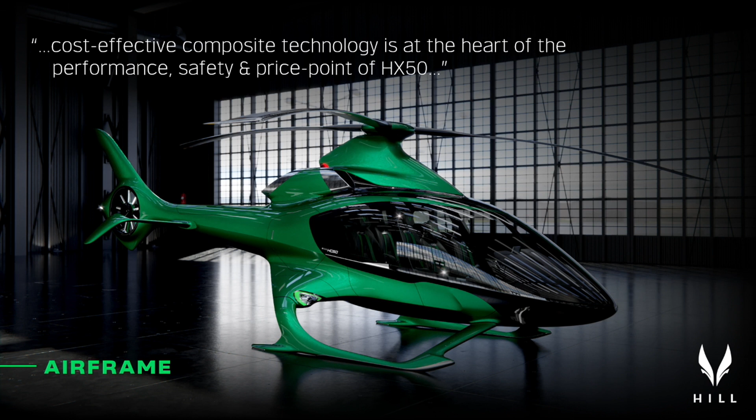Cost-effective composite technology is at the heart of the performance, the safety, and the game-changing price point of HX50. For that reason, tonight we're going to be talking predominantly about our composite development process. It's only been around 18 months since we took the bold decision to make the main structure of HX50 in a single piece, a monolithic carbon fiber crash cell, beautifully styled, aerodynamically sculpted to give us the balance of performance, strength, and importantly, cost effectiveness that we need to bring this game-changing helicopter to market.

In addition, we also laid out how we intended to make this thing with a very clever arrangement of external tooling. Since then, we've pulled together a range of technologies from lots of different industries involved in composite production to bring the price point of composite manufacture down to something that we needed.

In order to do that, we've had to reject the aerospace norms. We've had to vertically integrate not just the carbon fiber manufacturing, but the pattern making, the mold making, and then the part manufacture itself. And with that has come end-to-end control of the quality, the schedule, and the cost.

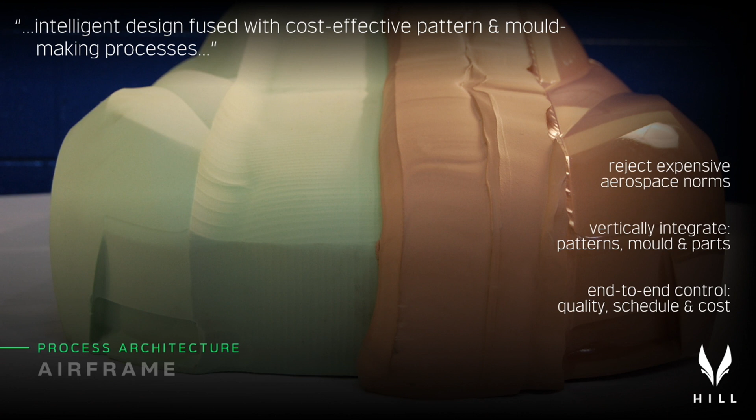Not just the cost of making the finished airframe, but also the cost of developing a viable airframe. Because if a set of patterns and tools cost you huge amounts of money, you're not going to be inclined to want to iterate the design. And of course, building stuff and iterating the design is by far the fastest way to refine and converge to the solution that we know we need.

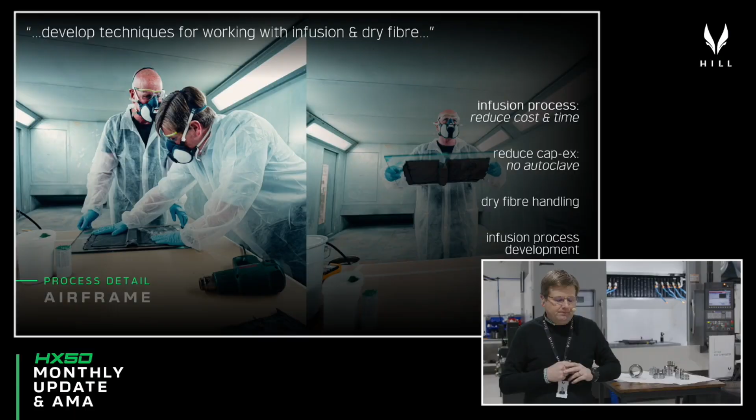That's been our approach all the way along, and that's what tonight's session is really about. We've made it very clear for a while that one of the key ingredients to our composite approach is the use of infusion.

What that means is we can buy the carbon fiber in the cheapest possible form, so aerospace grade fiber, but in the lowest cost format that you can buy it, high quality resins, again in the lowest price point format that we can buy, and then add the maximum value ourselves.

But to do this, we've had to master a wide range of techniques to allow us to hold the dry fiber, stick the dry fiber to various parts of the mold, and then manage all of the infusion process parameters to the extent that we need to create aerospace grade structures.

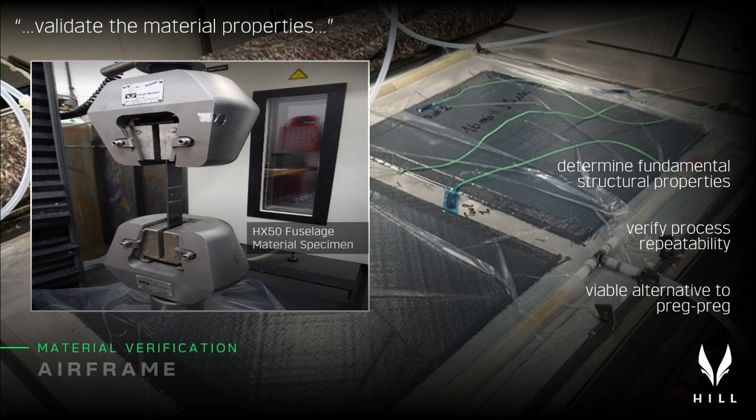And that's precisely what we've done. Once we'd done that, we had to produce a bunch of material specimens and validate that this combination of processes and materials enables us to produce composite material with the required mechanical properties to be viable for an aircraft structure. You need high carbon content, you need it profoundly defect-free, and you need it repeatable and controllable. So we produced test specimens, they got tested, and by the time we'd got all of those elements together, we believed we could produce a one-piece carbon fiber fuselage.

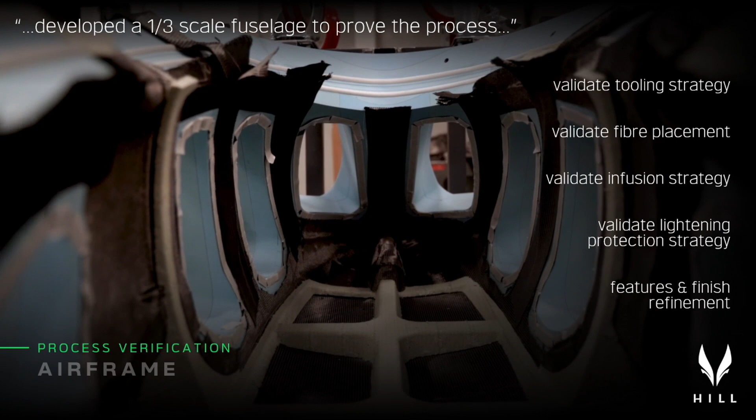To bring all of those parts together, we elected to make a third scale model. That was really just to prove the point, and to prove it quickly before we had to invest in vast amounts of infrastructure and additional people and expertise to build a full-scale airframe. And that's precisely what we did.

A little under a year ago, about 10 and a half months ago, we set about producing a third scale version of the HX50 fuselage in order to bring together the tooling technologies, the molding approach, the infusion strategies, the dry fiber handling techniques we needed to use, and then to deal with the feature definition, fit and finish of all the ingredients needed to make a one-piece carbon fiber fuselage at a price point that could bring general aviation back to life.

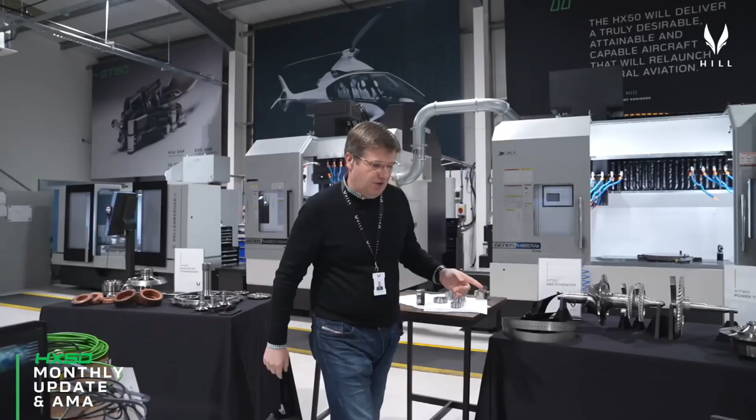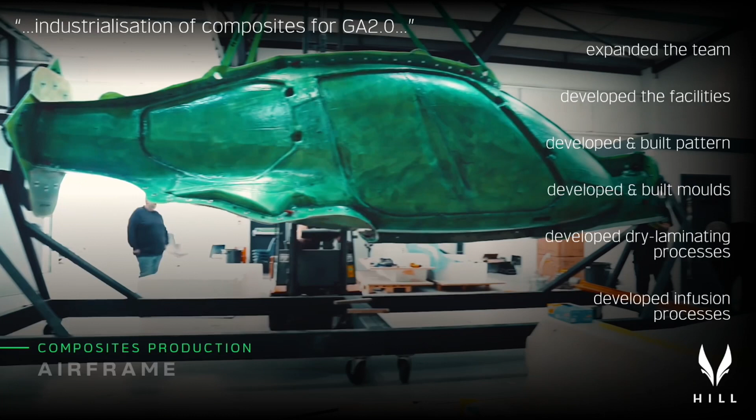So what I'll do now is show you what these patterns actually look like, and what the first stage in this whole process actually is. Let's go over here and have a look.

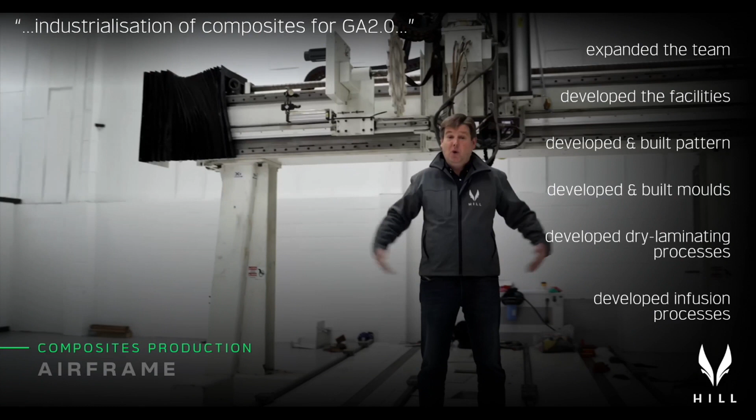So what you can see in front of you here is the pattern for the belly of HX50. These two big apertures here are the undercarriage doors, and the various things you can see around the side are evidence of the refinements we've made in surface sealing, panel pattern vacuum integrity, surface quality, and all the other steps we've had to go through to get these patterns to the point where they do the job properly.

And this hasn't been easy. This has been a very, very hard-won process. And again, to reinforce the point I made earlier, some of these things you only learn by doing.

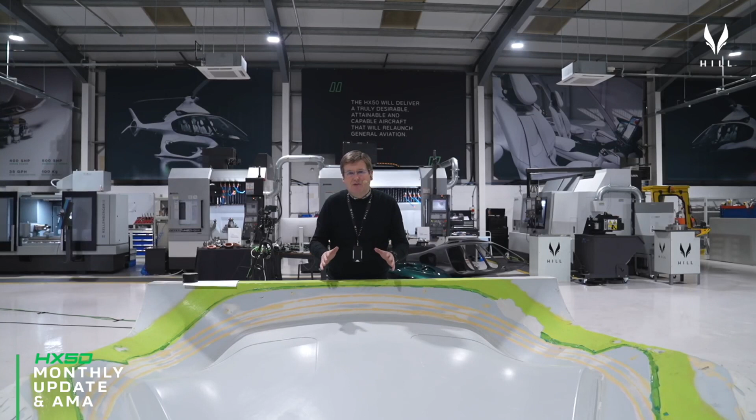The techniques required to work on these patterns, to move them—some of the body side patterns are actually made in two halves. So being able to align and manipulate those patterns, handle them and store them, all of these things have been developed by us from scratch to be able to deliver this in the way you can see in front of us.

In terms of further refinements, the very next stage is to develop a range of heating and temperature control processes to enable us to better control the infusion as we make molds from these things. The basic recipe, as we've shown you before, is essentially derived from boat building: a low-cost polystyrene base, a fiberglass cover, and some magical sealing layers on top that give us the vacuum integrity we need to create high-quality infusions.

Once you've done this, you're in a position to take molds. The molds we've made for HX50 essentially come in 5 enormous pieces. Let's go and have a look at them.

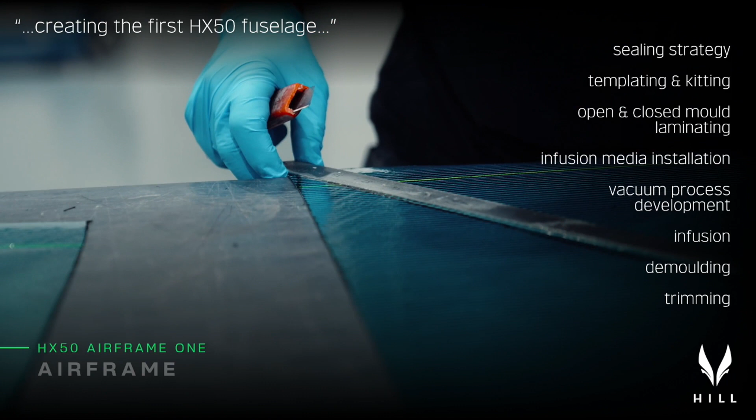Sorry, I'm forgetting myself. So the molds that we've got—sorry, I'm jumping ahead.

The molds that we've got are essentially made in 5 giant pieces. What you can see here—again, ignore this big thick green coat on the outside, that's one of the measures we've taken to improve vacuum integrity on these early molds—is that the 5 pieces are joined together externally because we need to surround the fuselage to be able to remove the molds and extract the fuselage from the mold when it's finished.

Each of these flanges has complex sealing arrangements inside so that once they're sealed, they create complete vacuum integrity. Then we bag to the inside face of the tool in order to create an envelope in which to put the carbon fiber, the reinforcement material, and then infuse into.

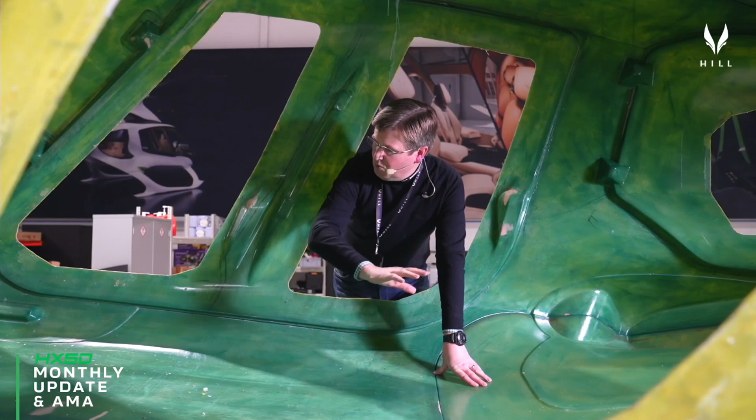So if we go and take a look inside, I'll show you what we've done to create a tooling surface that we can work from. Inside, what you can see is we've generated a much smoother surface, and this is the surface that transfers directly onto the part. This is the environment that the guys have to work in to make the fuselage.

It's important that these apertures here are big enough to get the carbon fiber in, for the guys to reach in, to be able to bag, to get the infusion media in, and then ultimately to draw down a vacuum and infuse the fuselage in a single piece.

And this process again has been quite a demanding process to master. There's a lot of elements that go into producing these panels with sufficient vacuum integrity themselves, sufficient vacuum integrity between the joints, and then all of the other things you have to sort out to get everything in and out that you need to, and finally to release the part from the mold.

And we've completed that successfully, and these are the first set of molds that we produced to create the very first HX50 fuselage. Let's go and have a look at how we built that fuselage.

So with a molding strategy developed and then validated at full scale, with a set of molds that can hold a successful vacuum with access in there so that we can get all of the materials in, the very next stage is to make the fuselage itself.

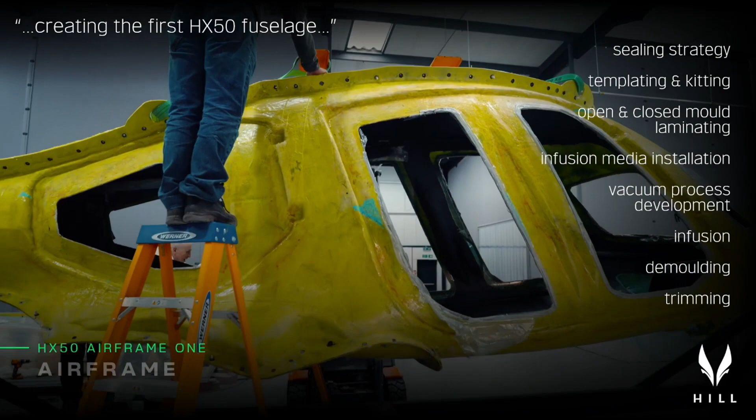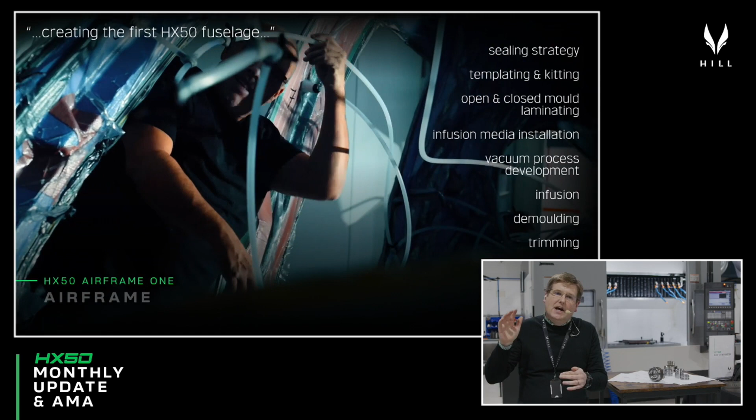Now, in order to make an infused part of any description, you have to be able to hold a near perfect vacuum. So the way that we seal around the molds and around the finished arrangement of molds is absolutely critical, and a lot of effort has gone into developing that. In addition to that, we've then got to get the carbon fiber in there.

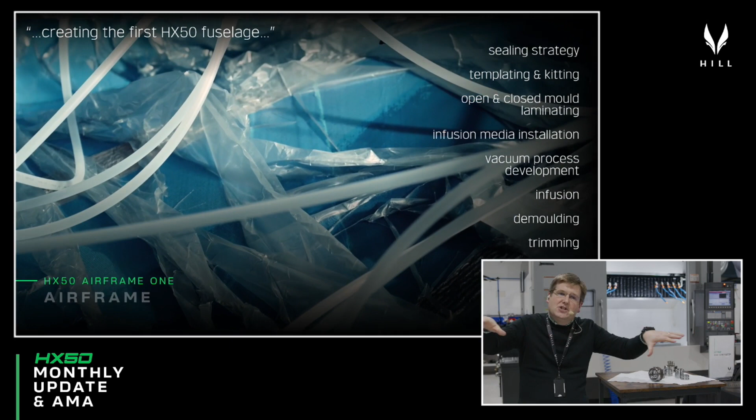The first plies can be done by assembling the arrangement of molds, kitting and laying the carbon fiber into those molds. But of course, then we have to fall back on all of those techniques we developed on the third scale model to be able to stick that dry fabric to the walls, stick that dry fabric to the roof, and then to be able to attach all of the infusion media, the resin distribution media, the pipes, and everything else that you need to be able to create an infusion.

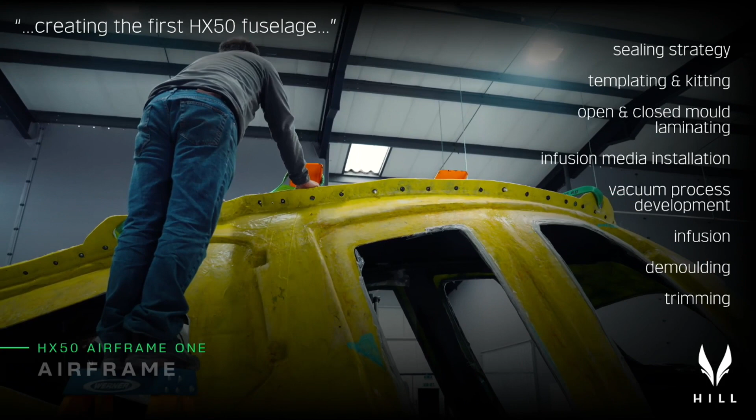Once we did that, we then had to draw a vacuum, maintain a vacuum, and then use our computer-controlled infusion machines to push the resin or draw the resin through the mold to deliver a cost-effective and practical infused component. With the infusion complete, we then demold it, and all of the excess material has to be deflashed and trimmed, and that reveals the very first HX50 fuselage. So let's go and take a look at what it looks like.

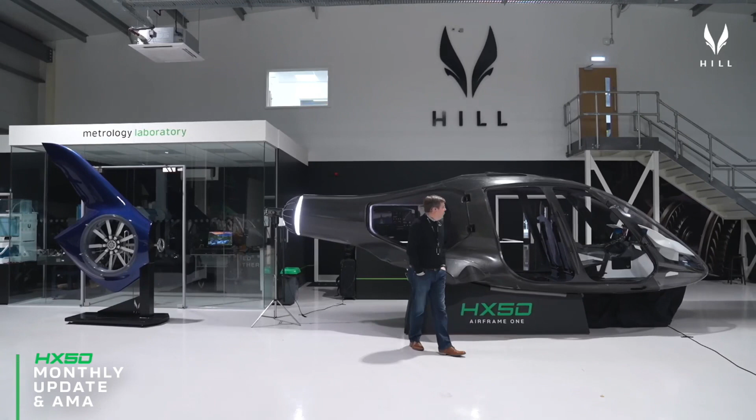It's taken me about 25 years of my life to get to this point, where we've managed to build the very, very first HX50 fuselage. Now, we promised you that we would build you a proper helicopter, and this is a proper helicopter. We've remained true to the concept, true to the beautiful look, the streamlined lines. We've managed to use composite processes that allow us to deliver this fuselage at a game-changing price point, and it's delivering on everything that we expect.

Now, this infusion isn't perfect, and I'll talk you through all of those things in a moment, but first, let's just have a look at this helicopter for one moment. The first thing you notice is the sheer scale of the thing. From nose to tail, it's just under 10 meters, well, just over 10 meters if you go to the tip of the tail. So it's much bigger than what you're used to. It has the proportions really of not far off what you'd expect from an A-Star.

If you come and have a look inside the cabin here, one of the first jobs that we've got to do with this fuselage is what we call a human factors mock-up. So you can do everything you want in virtual reality and augmented reality and modern fancy CAD systems, but nothing feels like sitting in something and feeling what that pillar or that view angle actually looks like, making sure you can move the flight controls, making sure that you can see the displays and that you can work the iPad.

So what we've done, very crudely, before we tool up all of these additional composite components, is used a lot of rapid prototyping hardware just to produce the center console, rapid prototype stick heads, representations of the monitors and the wolf's head that gives you the down angle, just to prove that all of these things work the way we intended them to. And we'll talk through all of that in a second.

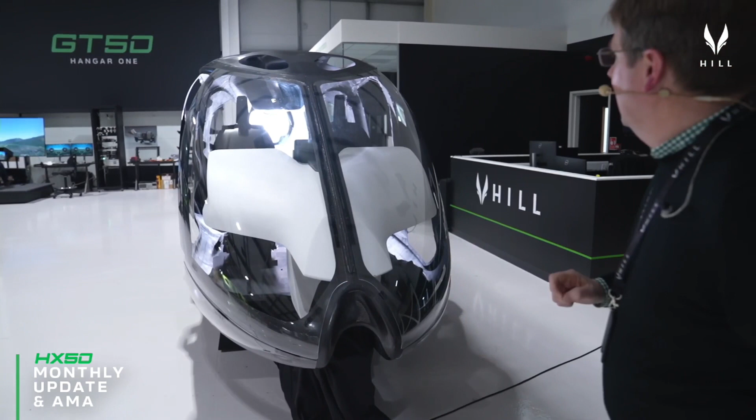And then when you come round to the front, you can see the fantastic view that everybody's afforded. These are the windows that we made ourselves, these are our tools. Again, only prototype tools, so the finish on these isn't perfect yet. It's again just to prove that this is the way that we're going to make the windows, more than anything else. And the space that we've got left here is, as I've told you previously, for your landing lights, and then the presentation of the badge underneath the glazing.

So Milan, if you just go back round that side for a second, and we'll talk through the interior. So there was a lot of discussion in the early days about the collective in the HX50, and as I said to you before, you can see it here in the way that it's implemented. The collective works in just the same way as it has on many helicopters, and just the same way as it's been implemented on certain other light helicopters and certain other bigger helicopters as well. So the action is perfectly conventional, up for up and down for down, but it's nestled neatly in the armrest so that your elbow can rest on the armrest here, and your hand moves conveniently for the puck that drives the integrated pilot interface.

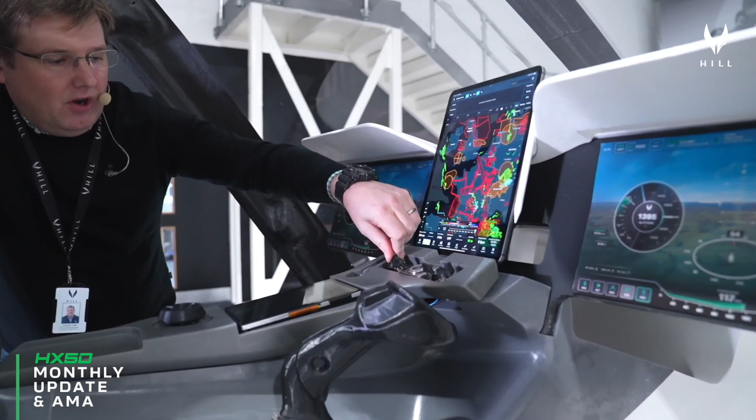We've also got the actual switches. Again, these are only rapid prototyped covers, just to check the size and the function of them. But we've got the start switch, the power switch, the master battery.

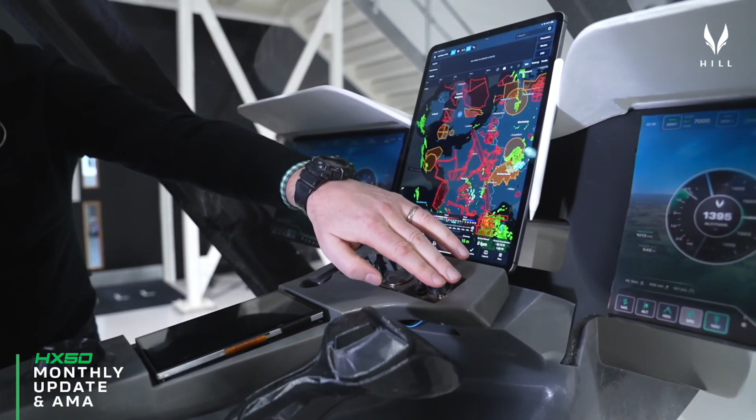We've got the avionics master, the start button, the nav lights, and then the fuel cutoff as well. That's a full-size iPad, the very big one. And then these are full-scale representations of the DigiCockpit interface. You probably won't appreciate it over the video link, but when you're sat here, these screens are very low, so the down angle to your eyes is just a little below 20 degrees for most people.

So you're still able to see essentially anything up to about 2 meters in front of you on the ground, and the view down through the chin windows is also really, really helpful, much akin to what you will have been used to previously. And of course, one of the beauties of having the center console, as well as the comfort when you're flying, is the fact that there's room for creature comforts in the cabin, like a bottle of water if you get thirsty. There's seldom anywhere to put that in helicopters that we're all used to.

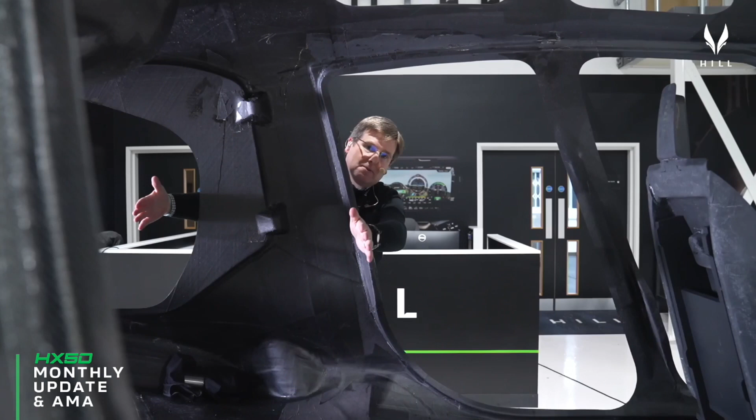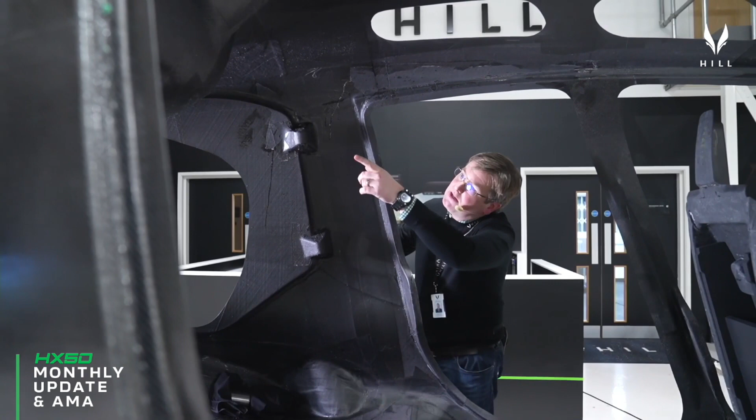And what you can see at the top here is the engine bay, and you can see how we've sunk that down into the roof just to keep it out of the wind and to keep that sleek exterior profile that gives HX50 its performance and its intended cruise speed.

So for those of you that like active outdoor pursuits and fancy holidays and such, it's important that this proper helicopter that we've made for you will support your lifestyles. I know we've got a number of golfers in the customer community, so just to assure you that getting multiple sets of golf bags in the baggage bay won't be a problem.

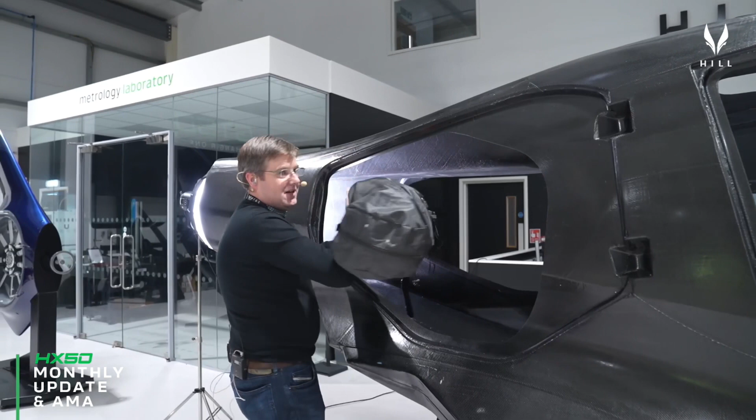And of course, for long, thin things, you can load all the way up into the bulkhead for the tail boom. And then similarly, this is a full-size suitcase, and you can easily get 3 of those through the door and back again, with plenty of room left on the other side to spare. So this really is genuinely a very, very large helicopter.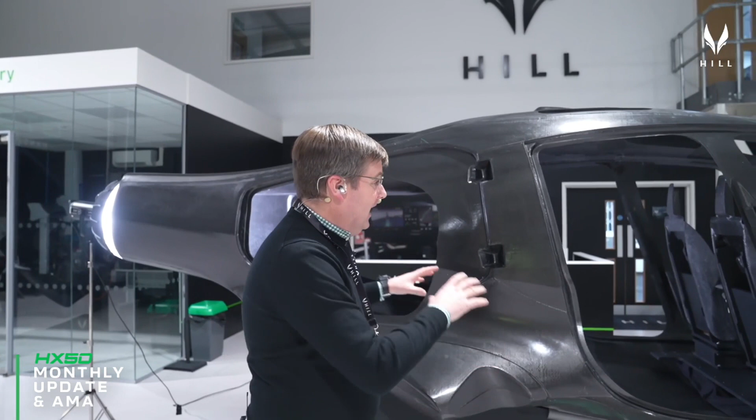The other thing I would say about this fuselage, and there's a little video circulating of me and my wife picking it up, just the shell before we put all of the HF mock-up stuff in there, is just 35 kilos at the moment. That will get heavier as we put all the other internal panels and things in there, but one of the advantages of carbon fiber is it is really, really light. It has a really fantastic strength to weight ratio that allows us to create everything, really. It allows us to create the Gucci looks, the aerodynamic form, the strength and the crashworthiness, all in a single package that, with these techniques I've outlined today, you can manufacture more cost effectively than ever possible before.

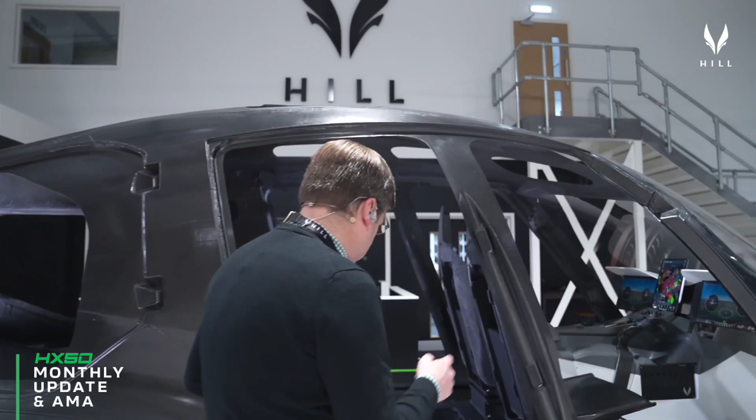Some of the other things that we've been looking at on the HF mock-up are things like door handles. It's not something we've talked about a lot before, but one of the things the guys have been trialing, again just very crude rapid prototypes at the moment, is the implementation of a Swandle-style door handle where you just pull and then open it, and it fits flush with the cabin door. You can see that height is accessible for everybody from the 5th through to the 95th centile.

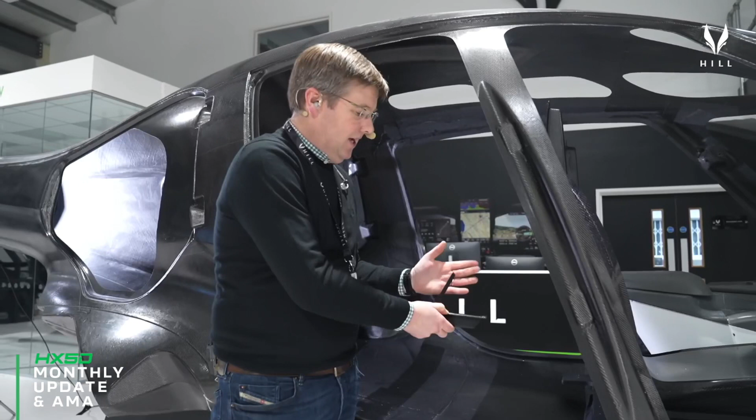And then again, similarly, this will be a chrome feature that sits in the top of the door rolls, both in the front and the back, an upward facing door handle that allows you to open and close, gives you a clear indication if the door's not latched properly, and locks down like that, all very discreetly packaged in the doors. So that's essentially an overview of the touchy-feely stuff about the first fuselage.

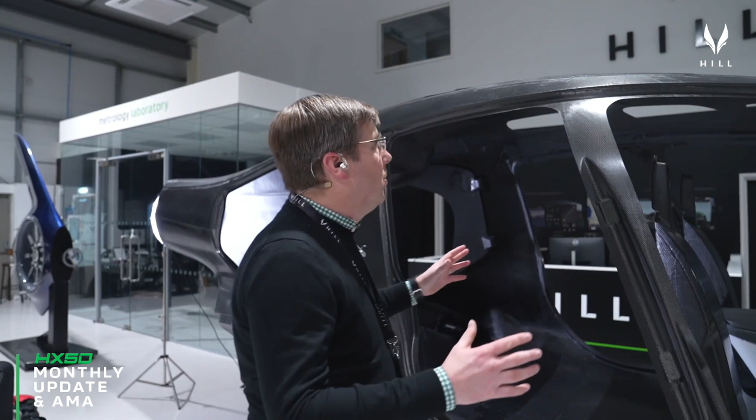If we talk briefly about what's gone into this technically, this is genuinely the very first one that we've ever made. And so, as you'd expect, it's not perfect, and we never intended it to be. The surface finish that you get on the carbon is entirely down to the quality of the patterns. The pattern surface finish transfers to the mold, and the mold surface finish transfers to the part.

This whole exercise has really been about proving we can make this cost-effective fuselage in one piece. So we've skipped a lot of the steps in creating high polished finishes on each of those, just because we don't need them for what we're doing here. So don't worry about the surface finish. We'll refine that when we cut the tools for the flying prototype, which will embody a few changes and a few things that we've learned along the way.

I think the other thing, and we went through exactly the same process with the third scale model, is in order to get sharp definition on edges, so these recessed panels here where the doors fit flush to the cabin to create the aerodynamic performance that we want, in order to create those sharp edges, we have to take what we call a carbon fiber bootlace, pack that into the tight corners in the mold, and then lay the carbon fiber over that so that we've got something for the resin to infuse into.

We didn't do that on these purely because we weren't interested in those edges. It's purely about the overall infusion strategy. And so there's a bunch of things like that. Similarly, we haven't put the lightning mesh in the roof of this one, and we haven't put any of the reinforcements in this one either. That will all follow on the second fuselage, which we'll be doing early next month.

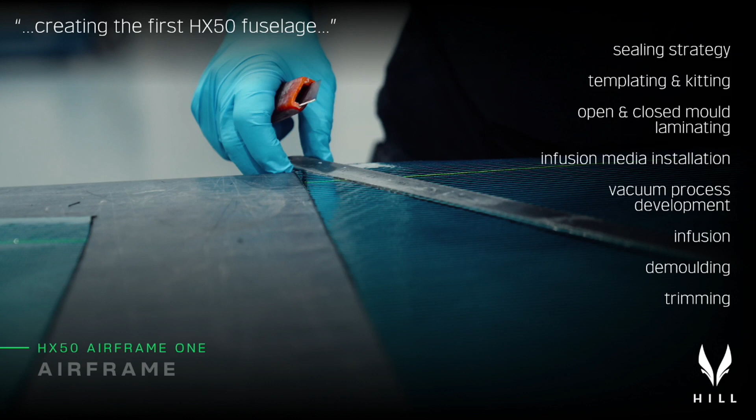Okay, so what does all of this mean for us? So essentially, what all of these processes mean and what all of this effort and all this vertical integration stuff means for both us, for HX50, and for our General Aviation 2.0 movement is this. We can build the aircraft that people want. We can make it look the way you want, we can make it perform the way you want, and we can deliver it at a price point that you can afford.

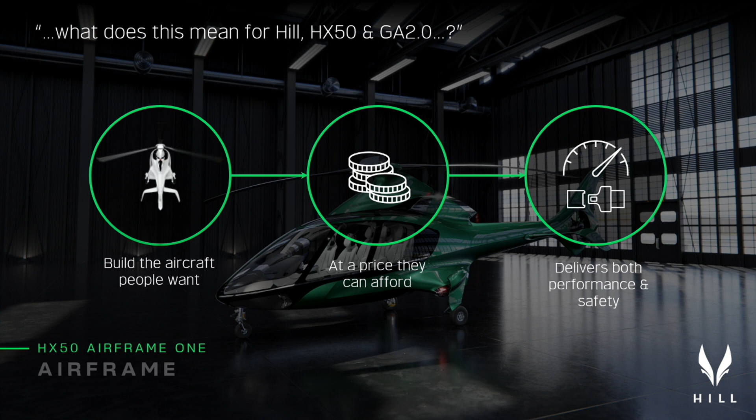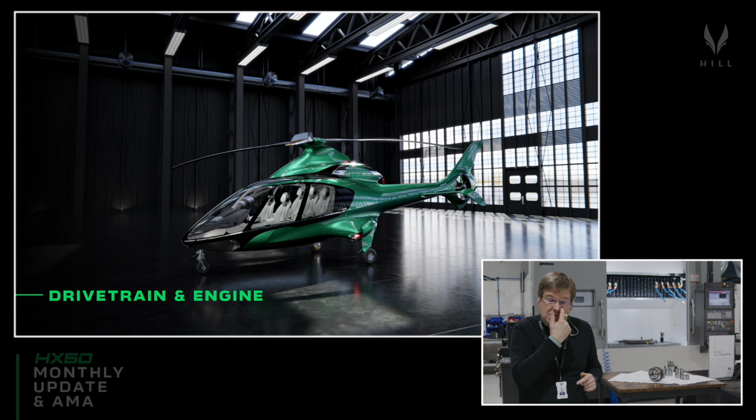Okay? These processes fundamentally allow us to make a step change in what you've been used to, because we can deliver both the performance and safety at the price point. That's what all of this effort's been about, and now it's just work. Now we've proven we can do that. Now we just have to complete the process. So let's move on from the airframe briefly, though I'm happy to answer any questions you've got on it a little later. Let's talk about the drivetrain and the engine for a while.

So while there's been a lot of focus across the company on the composites and the production of that first fuselage, the GT50 engine has been progressing equally quickly. We've now got a mature new gas generator design. So this is the single stage compressor turbine, the modified combustor, and all of the changes that have been involved there to make a simpler, more efficient, lighter, and easier to manufacture engine.

We're currently optimizing the new annular combustor that will run on both conventional and synthetic biofuels, and we're just in the final stages now of completing the aerodynamic optimization of that single stage turbine. The manufacturing preparation for all of these components is now underway. I'll show you in a little while how we've been developing bearings and turbine blades and the fabricated metal components. And with all of that, the performance targets, the life targets, the cost targets are all on track as we stand here at the moment.

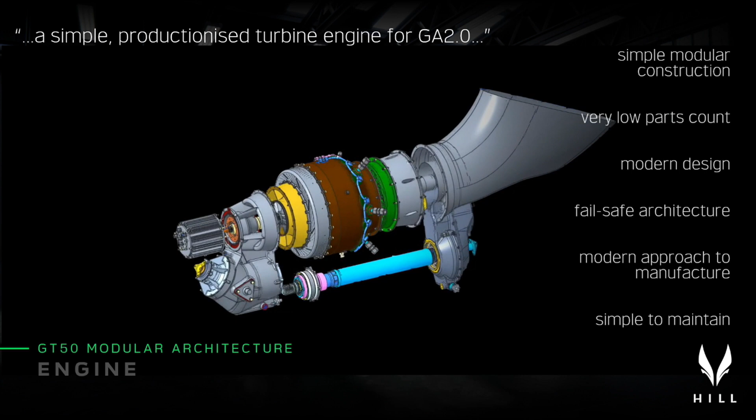So let me introduce you to the latest version of the GT50 engine. So the engine has a simple modular construction. It's got an extremely low part count, a very, very modern design, and a fail-safe architecture.

So this engine conforms to the very latest standards of JAR Part E and FAR Part 33, so it meets all of the fail-safe architectural requirements and probabilistic failure requirements that are now required, that weren't necessarily required when similar engines were first developed.

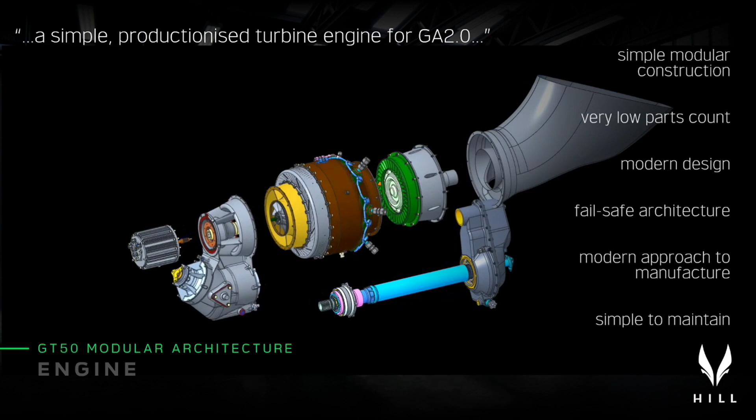And we've also got a modern approach to manufacture, both the CNC stuff that you've seen before, 3D printing and a modern approach to the metalwork and the fabrication that we've introduced previously. And above all else, with it being modular, it's very, very simple to maintain.

So the modular layout of the engine has a high-speed motor generator unit on the front, the inlet module, which contains a bevel gearbox, the de-icing and the inlet geometry, the gas generator module, the power turbine module, and then the drivetrain with the exhaust bolted on the back. Just those simple set of modules are all interchangeable and easy to maintain.

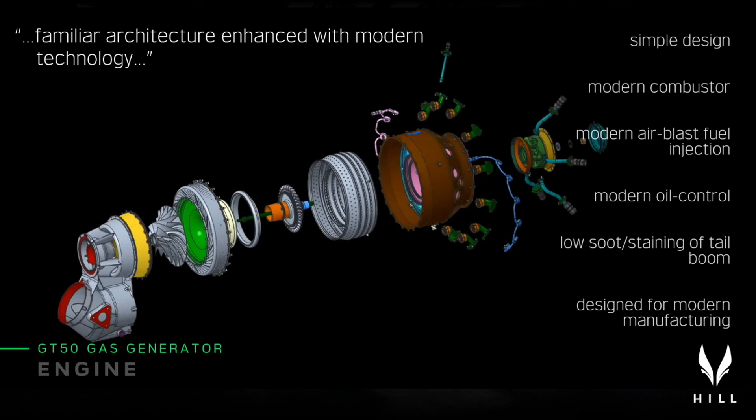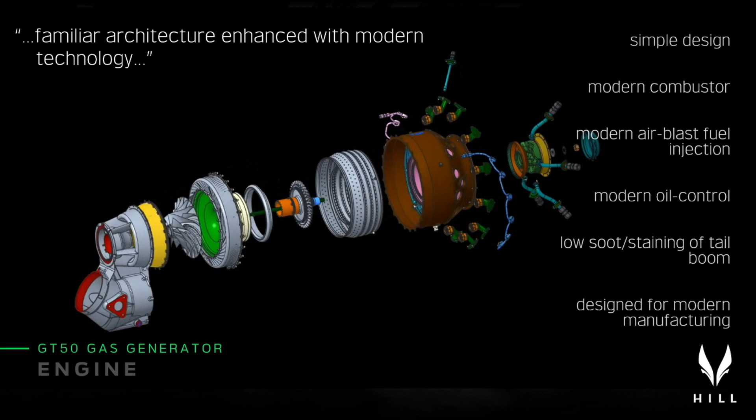If you look at the new gas generator itself, this embodies the very latest air-blast atomized fuel injectors. So that soot characteristic that we're all too familiar with, where helicopters will throw soot and oil deposits down the boom, the way that we retain our oil and the way that we inject and burn fuel within this engine is much more modern and should minimize that effect to a very substantial extent. The modern combustor also helps with that and gives the lowest possible emissions for this class of engine.

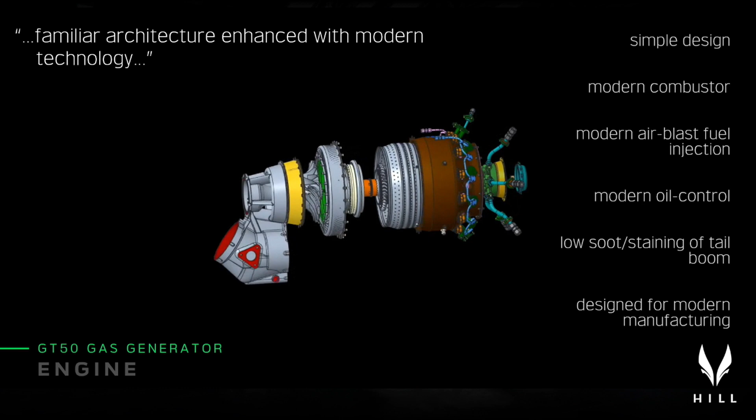And then on top of that, again, this gas generator module is designed to be simple and easy to manufacture, assemble, and maintain. If you look closely at the arrangement of the engine, what you can see is our fuel nozzles are actually removable from the outside of the engine, so they can be changed and checked and modified. The fuel manifolds can be accessed from the outside as well.

You can see the shape of the new annular combustor in the exploded diagram there, as well as the diffuser, the impeller, and the inlet modules as well. So all of these things are now maturing to the point that early in the new year we'll be able to produce this.

Now, one of the main barriers to prototyping modern gas turbine engines is the fact that the turbine blisks, the turbine wheels themselves, require very, very complex precision casting processes. These components are extremely sensitive to flaws and inclusions, all sorts of things that you would normally expect in a casting. And it takes quite a while to get those casting processes to work, and quite a big investment to be able to do that stuff in-house.

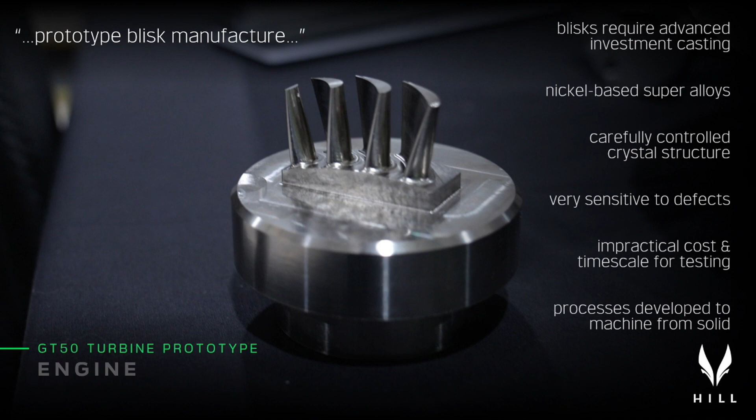One of the things that we've been doing to enable us to process through prototyping very quickly and avoid the need for expensive tools for waxes and various other things is to look at extensive machining of these superalloy materials for short-lived prototype components that are there to do primarily the balancing of the engine and the performance matching and the tweaking of the fundamental aerodynamic and thermodynamic performance of the engine.

So Mark and his team have been busily taking the actual superalloys that we need to use to produce these components and producing turbine blades in the correct materials. We've shown you previously that we can produce the actual turbine wheels. We've got the work holding and the fixtures for that. And over the last few weeks, we've perfected the process of machining these things from solid.

Now, this isn't a production process. This isn't how you'd make them in production. But what this does do is it allows us to make prototype blisks very, very quickly. For the non-rotating components, it's much simpler because we can 3D print them, we can cast them, and their duty is a lot less arduous.

But for these high-speed components, where they're very, very intolerant to defects, these have to be very high integrity. So we can now buy forged stock of this material, machine them from solid, and demonstrate the performance of the engine in a much more cost-effective and practical way.

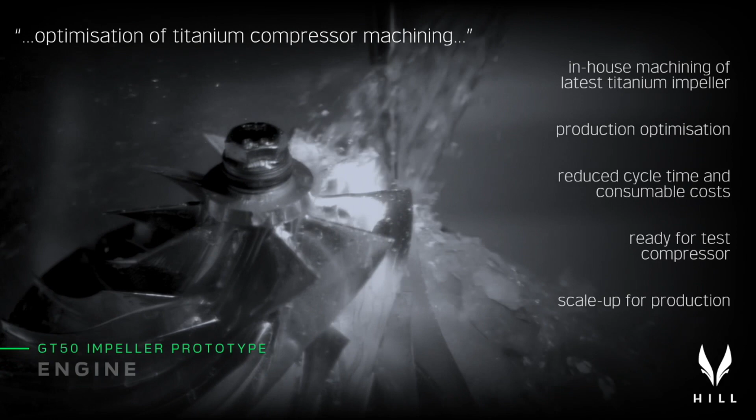In addition to that, we've also been doing some further refinement of the in-house compressor. So we've previously shown you the final aerodynamic design of the compressor, and we work with our tooling partners to optimize the machining parameters and the tooling types, the tooling inserts, the feeds and speeds, all the things that you need to do to optimize it.

This has now come back home, and our own CNC team have been optimizing the cutting strategies and the way that we manufacture this in-house to get the cycle times down to the absolute minimum, so that we require the smallest number of CNC machines possible and have the shortest possible cycle times to make these components that drive the cost of the engine.

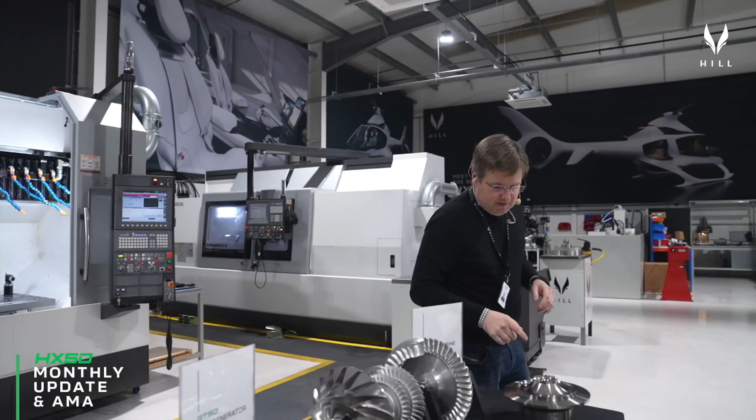And what I can show you here is actually the very first titanium compressor that's been made in-house by us using these new processes. So this is the blank. All of the turning ops, the labyrinth seals, the curvics have been completed, and this is going on to the 5-axis to have its blades cut either tomorrow or Thursday. So big progress on that front also.

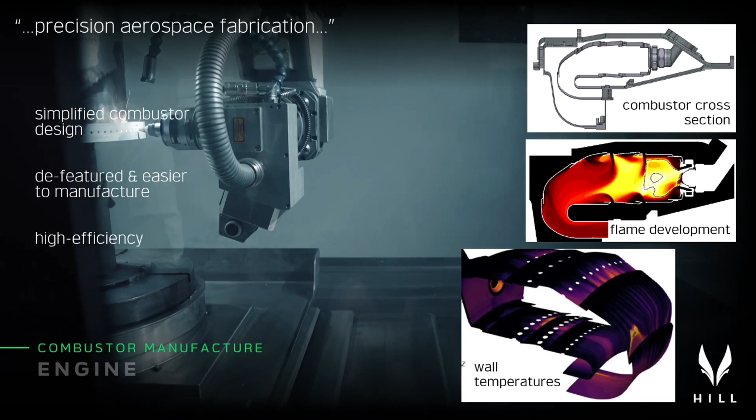So we're in a position now where not only can we produce the prototype titanium compressor, but also the turbine blades, and very shortly the sheet metal work that's required for the combustor will follow suit. So the combustor is an area that is crucial to the design of the engine. It dominates the stability of the engine, it has a big impact on the efficiency of the engine, and it has a big impact on the reliability of the engine.

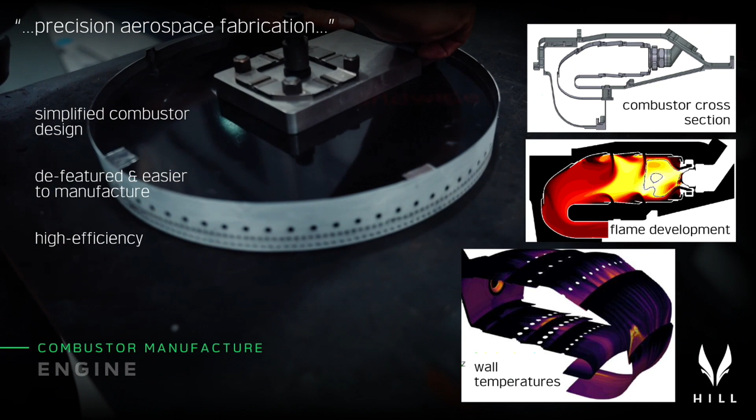We've been using the very latest computational methods to optimize the way in which we spray the fuel, the way in which the fuel burns within the combustor, optimize the metal temperatures and the cooling flows to keep those metal panels down at temperatures that they can survive, and all of the time doing that in parallel with how we physically manufacture these things. So 5-axis, CNC laser cutting, laser drilling, and laser welding, and then making the simplest possible embodiment of this combustor that we can to deliver a cost-effective combustor to go with the other components within the engine.

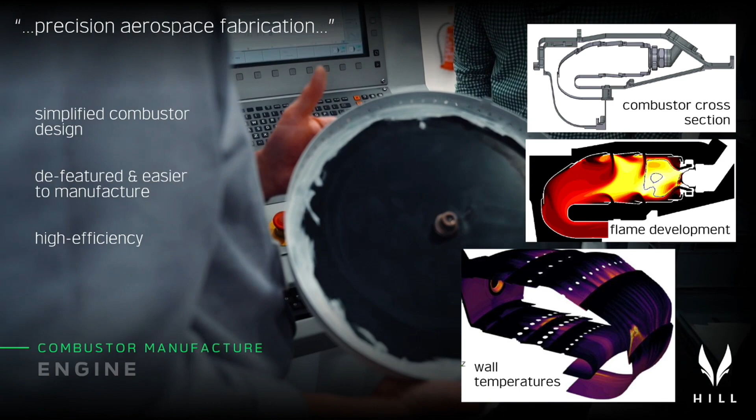In other news, you're aware that we've been working on our in-house bearings for some time now, turning and then grinding the internal bearing races, the external bearing races, and then the cages. So this is a cage. We produce it in one part, drill the holes and then split it. All of that work has been completed, and a few days ago we produced the very first internally manufactured Hill bearing, and this is actually an early version of the gas generator bearing.

So this is actually the most difficult one to manufacture in the entire engine. This thing spends most of its life at 50,000 RPM, which is an incredibly demanding duty for a bearing. And so that's the first one out. Again, there's a bunch of things that need to be refined before we're ready to test this, but as of today, we can produce our own bearings. And so that's another big step forwards on our route to getting GT50 on the bench.

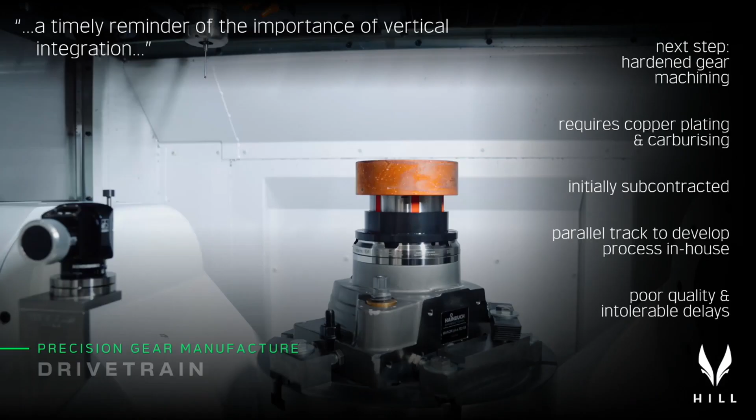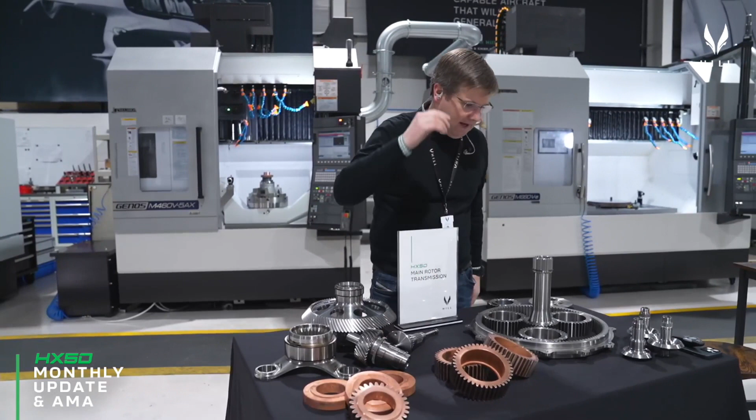You've all followed the progress that we've made on manufacturing our own in-house gears to drive down the costs of the main rotor transmission, the engine transmission, and the tail rotor transmission. You've seen us master the gear manufacturing that you can see here. So the key elements of the main rotor gearbox, the spiral bevels, complex gears, complex splines. The very next step is then to harden these teeth and complete the hard machining so that the teeth can deliver the life that we need from them in service.

Now, this is another example of why vertical integration is so important to getting costs under control in aerospace, in particular in general aviation. The next step in this whole process, as daft as it sounds, is copper plating. So we create a blank that you've seen before. You've seen these things all looking shiny and freshly cut in steel. They then have to be sent away to be copper plated.

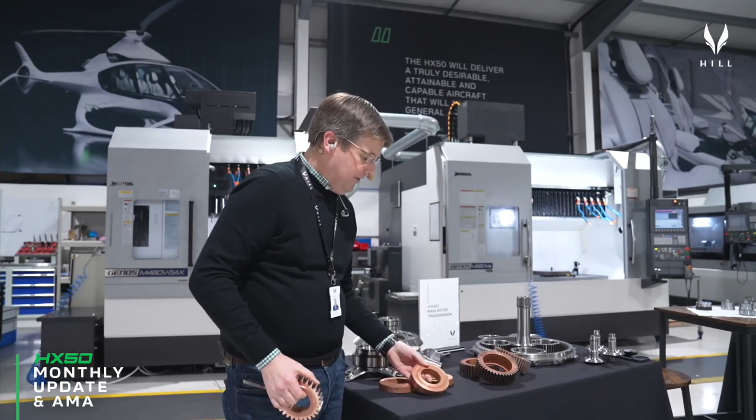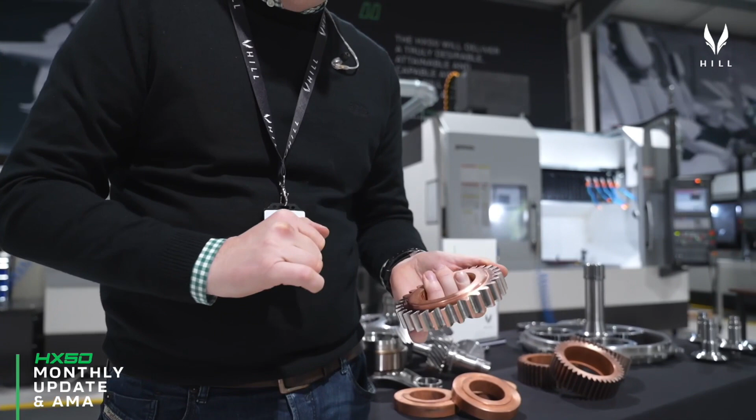And the reason for that is when we come and heat treat gears, we only want to heat treat the teeth. Okay, we don't want the structural part of the gear and the root material to be hardened, because if it was, it would become brittle and it would have a poor fatigue life and a poor fracture toughness. And so we have to cover the rest of the gear in copper plating so that when we put it in the furnace and carburize it, this material isn't affected by that process.

And that simple process has essentially taken, with a third-party subcontractor, 3 months. So from the time our bits were ready, for a process that takes minutes to complete, we've been waiting around for 3 months to get those done. And in that same time period, I've been able to recruit the people necessary to develop these processes in-house, develop the processes, and over the next few weeks on the run-up to Christmas, we'll be doing this for the first time in-house to avoid those kinds of things.

When you think of all the little things we have to do to make these things, if everybody can create a three-month delay in what they do, you've got no control of your time scales. That's another example of why vertical integration isn't just important for the big things in production, it's actually important for controlling your time scales in-house while going through development. This is another great example of just how much impact that's had on our business.

Okay, let's briefly talk about the digital cockpit. One area I haven't provided much update on recently is how we make the HX50 an incredible helicopter to fly. A lot of that comes down to flight dynamics - how we manipulate the aerodynamic surfaces and flight mechanic characteristics to make the aircraft fundamentally stable, then augment that with stability augmentation and intelligent control.

Over the last two weeks, we've been working with our flight dynamics team to start developing the detailed flight dynamics models of the aircraft. Now that we've refined the mechanical and structural design, established the inertias and formal aerodynamic design, that allows us to develop how the two-axis autopilot will deliver stability augmentation, altitude, heading, speed and navigation hold functions, and haptic feedback for envelope protection and power management - plus for those who opt for the four-axis autopilot, additional support to make the aircraft even easier to fly.

One thing we expect to make the biggest difference is active yaw control - substantially decoupling the impact of the collective on the pedals and providing stability in yaw to gusts and winds from all directions. The four-axis autopilot will give simultaneous control of altitude, speed, heading or nav, and yaw. It can hover hold, essentially giving cruise control in every aspect of flight, plus much more extensive envelope protection including VNE, rotor RPM control against overspeeds, vertical speed limits, vortex ring state protection, and protection from incursions into the height velocity envelope, on top of auto-rotation assist.

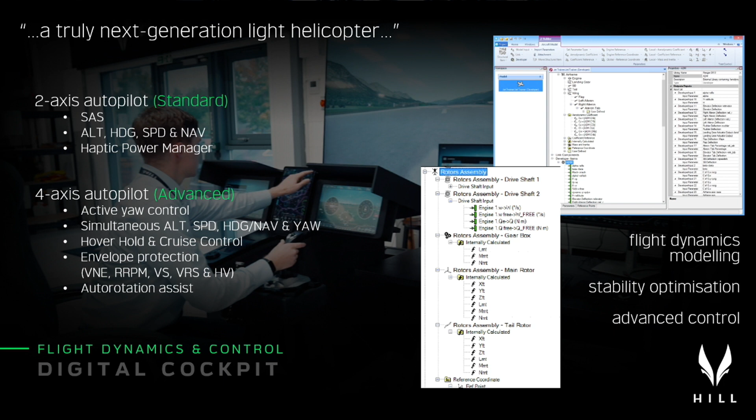All of those things are actively being developed now that we have the user experience developed to a point, and the mechanical and structural elements of the aircraft developed to a point, that we've got the inputs to develop out those algorithms and the software to deliver it on the DigiCockpit.

So onto the DigiCockpit for a moment. One thing we're focused on, and Eric in particular is focused on, is integrating all of the peripheral equipment into the DigiCockpit and writing certification-grade software to implement these things. We're only going to do this once, so we need to implement them properly - that's a very tedious process, one step forward and another step back sometimes. But that's all being done at the moment.

We'll take you over to have a look at the avionics test bench and see how Eric's getting on. We've also upgraded the avionics test bench to include actual flight controls now, so a lot of the workflow and man-machine interface between the intelligent technology we're building into the autopilot can be tested, integrated with the flight simulator, the flight controls, and the user experience. All of that is currently being done as we evolve through software development.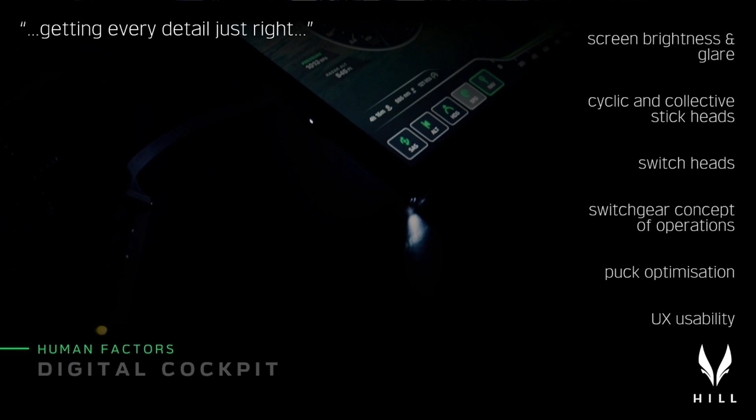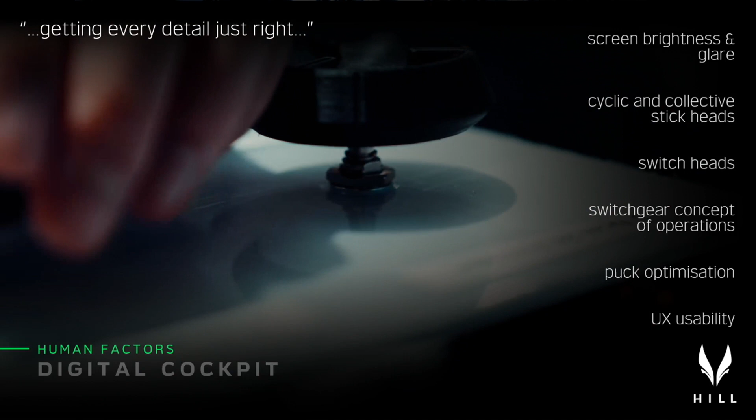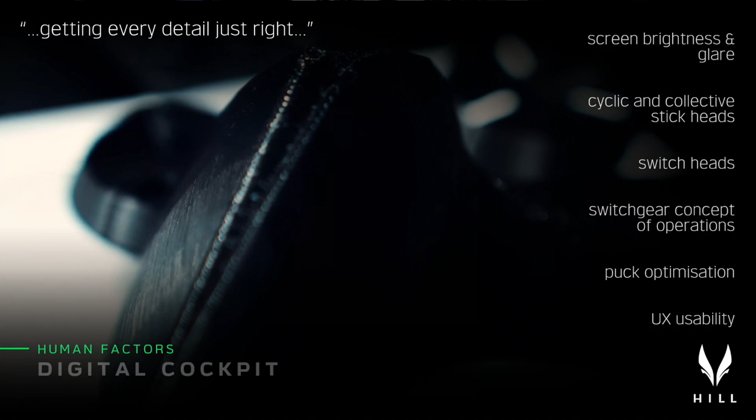In other DigiCockpit news, it's really important, as you've seen with the HF mock-up we're building into the first fuselage, that we get every single detail right about this helicopter. It's no good just looking good - every part has to be fit for purpose and properly optimized. We've been doing trials on screen brightness, making sure it's dim enough at night and bright enough in the day. Now that we've got the glazing fitted on the fuselage, we'll be testing the screens for glare in the roof windows, side windows, and windscreens, developing the right balance of coatings, anti-glare, anti-reflection, and the right amount of light coming into the fuselage through the tints.

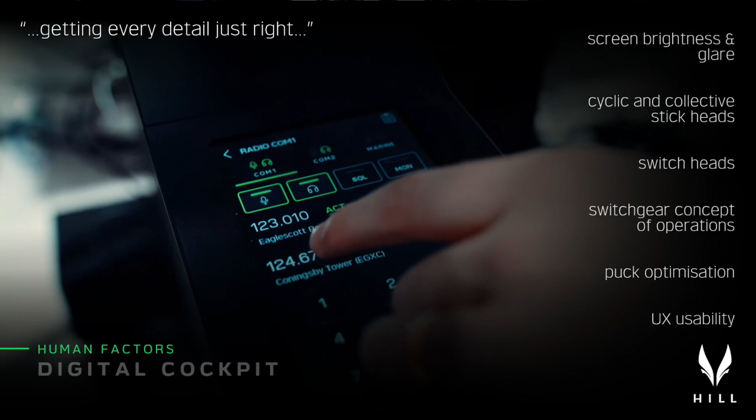We're doing some work with mock-ups of the cyclic and collective stick heads so they work properly and interact correctly with the digital cockpit. Even small things like button heads and switch heads all need to work and feel right. So that work's going on right now, including things like puck optimization and user experience usability.

So let's go over to the avionics test bench and have a look at some of those things and the work that Eric's doing.

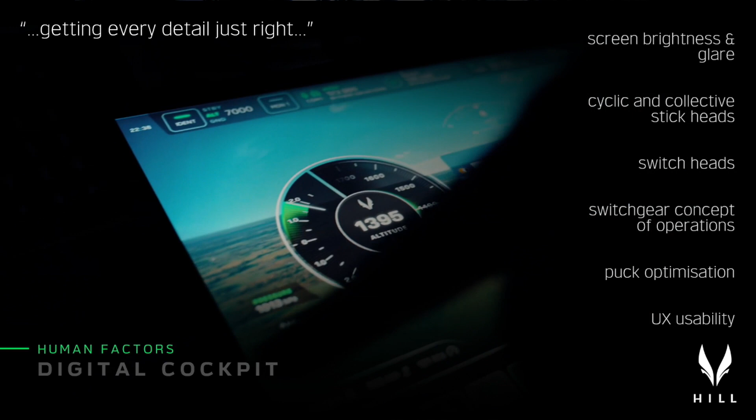So I pointed out previously that a lot of the hardware that will actually be on the aircraft is installed on this rack and properly wired in. These are the actual switches, only rapid prototype heads at the moment, but these are the switches that will find their way onto the cyclic and collective. And then we've got the circuit breakers, contactors, power supplies, and all the other elements that go into it, all being driven by the user interface.

The target hardware that we've shown you before - at the moment the system is running on a PC while we develop the user interface and the software, and then it will be ported down to inexpensive target hardware that will go onto the aircraft.

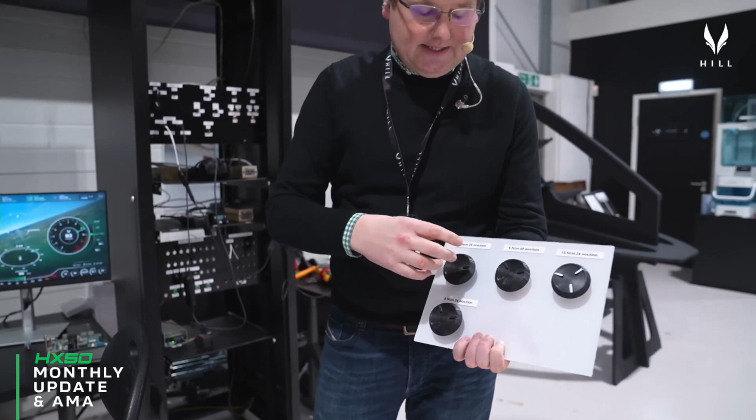One of the things that may seem trivial, but one of the things we have to make sure we get right, is that every way you interact or touch the aircraft needs to have a premium feel. So even silly things like the feel of a click or the notchiness of the puck as it indexes around the encoder is really, really important. So we've built a bunch of samples with different stiffnesses of encoders on the back so that we can get that just right.

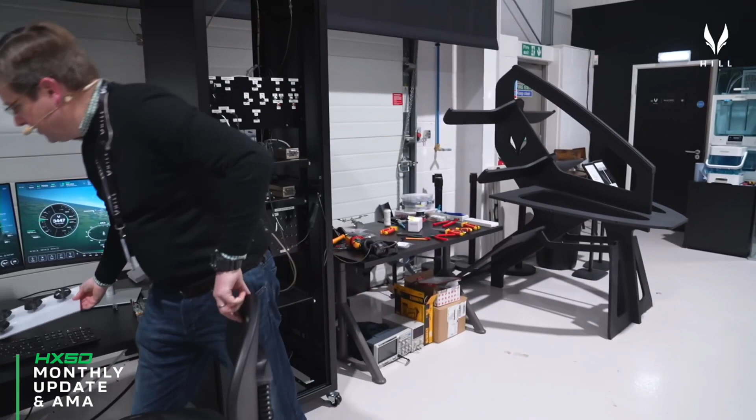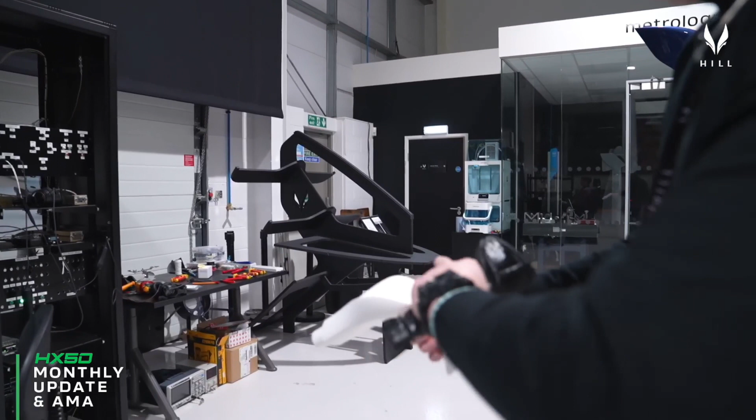The stick heads, as I mentioned earlier, have been rapid prototyped using a simple rapid prototyping machine just over there. One of the things we've discovered immediately is that we need to tweak some of these angles slightly to make it easier to get your thumb round to activate some of the buttons, and the feel of these can be optimized slightly as well. So very simple tricks to make sure that when we spend money tooling these things and build the real things, they feel as you would expect them to.

If we just have a look at the engineering simulator that we've got over here for a second - as we've shown you previously, this is currently feeding the digital cockpit information via an X-Plane simulator so that we can work through all the nuances of the user experience and the user interface.

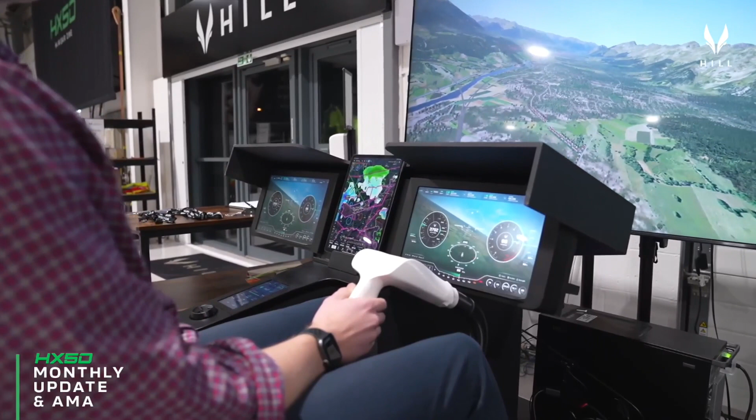One of the things we've added is flight controls again, so that we can look at haptic feedback, so that we can look at control sensitivity, so that we can look at control algorithms when we replace the X-Plane environment with the flight dynamics model that's being developed right now. So all of that work is ongoing, and Eric's busy implementing the control software that uses that interface to drive those boxes up to certification levels.

Are any of the demos ready at the moment, or still playing up? Okay, so that's one for next time then.

So yeah, that's the digital cockpit and where we're up to with that.

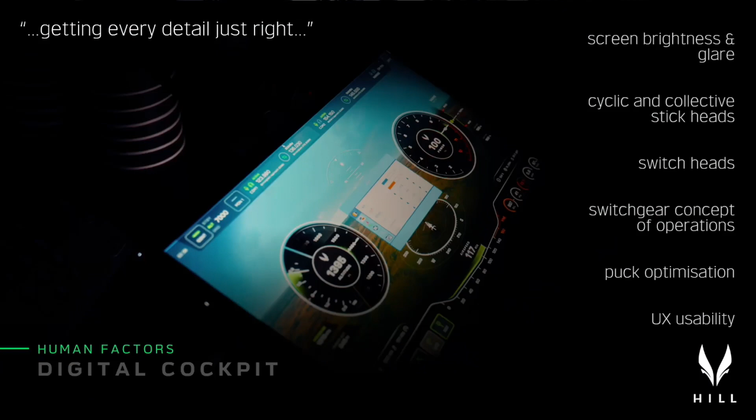Okay, so one of the other areas that's receiving a great deal of attention at the moment is the production. With the large demand for the aircraft, that's putting significant pressure on us to make sure that our production facility is ready and capable of scaling up to deliver the number of helicopters that we need in the time frame that we need to.

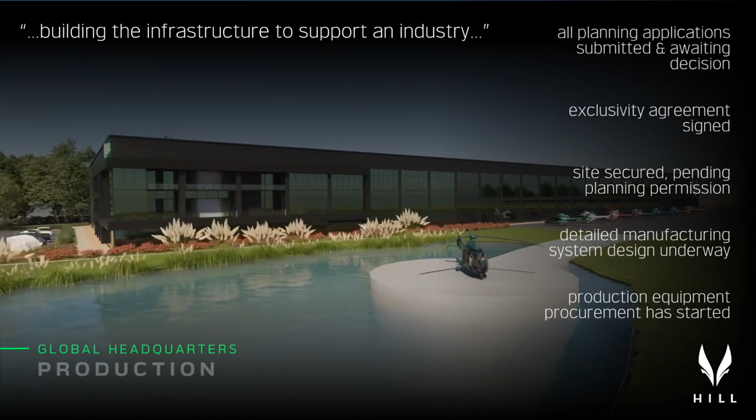So in parallel with all the activities going on from an engineering perspective, we've been pushing through all of the planning applications that are required. There are 3 in total - they've all gone in and been submitted and are now awaiting a decision from the local government. We've signed an exclusivity agreement for the site at Cresswell, so we have a site waiting to build this building subject to planning permission.

We've got detailed design underway for the manufacturing system - all of the cellular manufacturing that needs to go on for the precision engineering components, for the composites, the assembly, and all the other stuff needed to produce the componentry, and then the full assembly process, including the build school. That's being driven forwards at the moment.

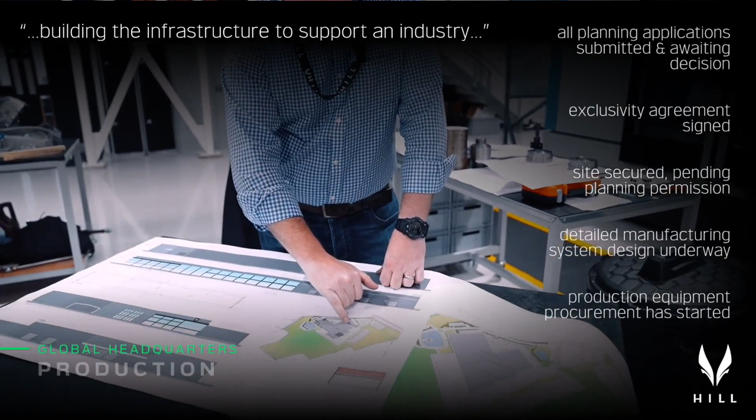And we've also now started the procurement exercise for the major chunks of production equipment that we need to deliver all of these processes in-house. In addition to that, we're currently working up a deal where we're planning to host the Stoke-on-Trent Air Ambulance at the Hill global headquarters.

One of my core philosophies is that for a business to be successful, everybody needs to be successful, and that means the people that work for us, our customers, and also our neighbours.

The Stoke-on-Trent area and the surrounding Moorlands villages have struggled for many years to gain access to an air ambulance. In the UK, air ambulances are not funded by the government and they're not funded by companies, they're entirely funded by charities. So we've offered to host the air ambulance charity at our facility, providing the heliport facilities, fuel services, hangarage, flight crew and ground crew facilities they need. This will dramatically cut the response time for emergency medical services for people in and around Staffordshire Moorlands and our factory site. There's much more information going to be pushed out on this over the coming months, but I thought I'd share that with you tonight, as it's genuinely good news for everybody in the surrounding area.